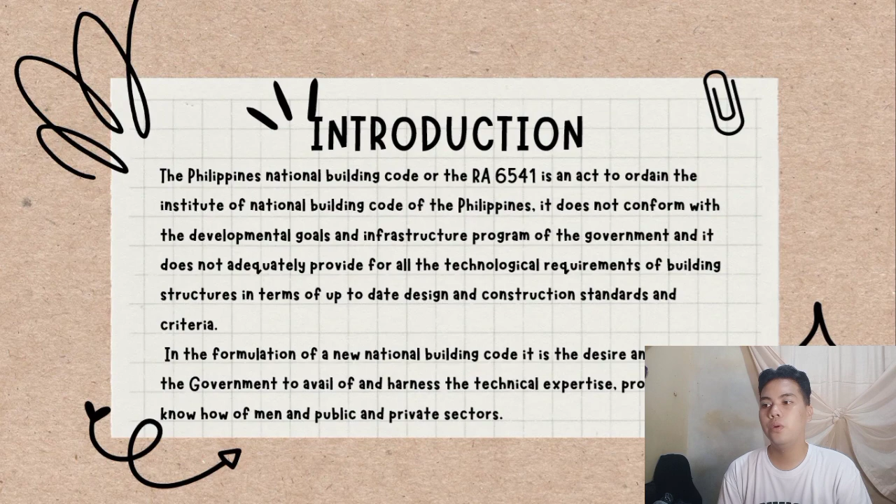In the formulation of a new national building code, it is the desire and policy of the government to avail of and harness the technical expertise and professional know-how of men in the public and private sectors.

General provisions on the building requirements and site requirements are as follows: 1. All buildings or structures, as well as accessory facilities thereto, shall conform in all respects to the principles of safe construction and must be suited to the purpose for which they are designed. 2. Buildings or structures intended to be used for the manufacture and/or production of any kind of article or product shall observe adequate environmental safeguards.

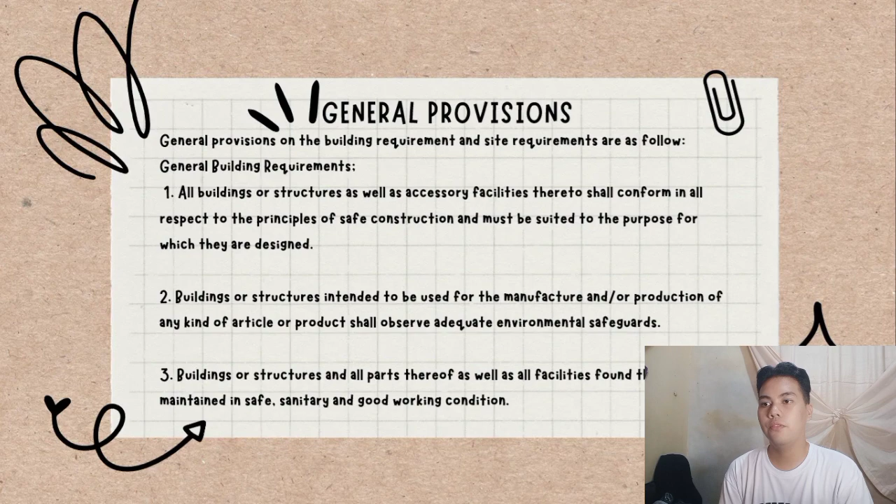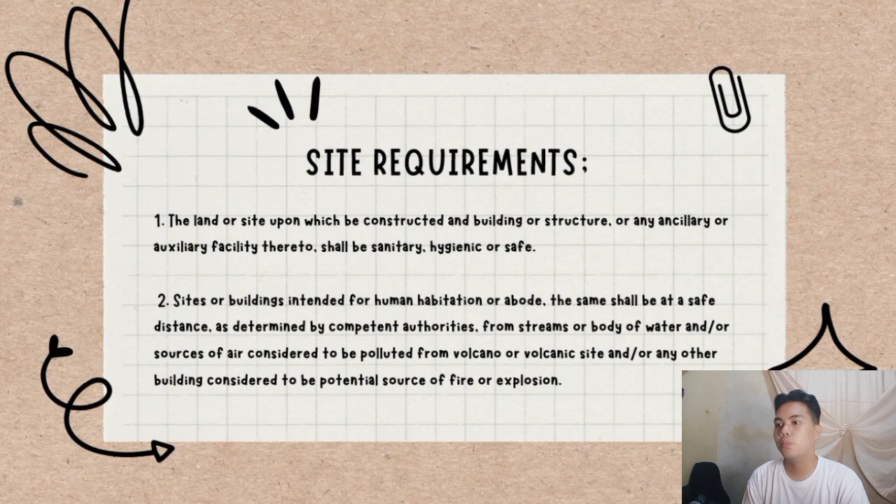So we have here the site requirements. 1. The land or site upon which shall be constructed a building or structure, or any ancillary or auxiliary facility thereto, shall be sanitary, hygienic, and safe. 2. Sites or buildings intended for human habitation or abode shall be at a safe distance, as determined by competent authorities, from streams or bodies of water and/or sources of air considered to be polluted, from volcanic sites, and/or any other building considered to be a potential source of fire or explosion.

So, types of construction. There are 5 types of construction. This will help the learners understand what type of construction or building they see in public. It will also help them identify materials to be used in making such infrastructures.

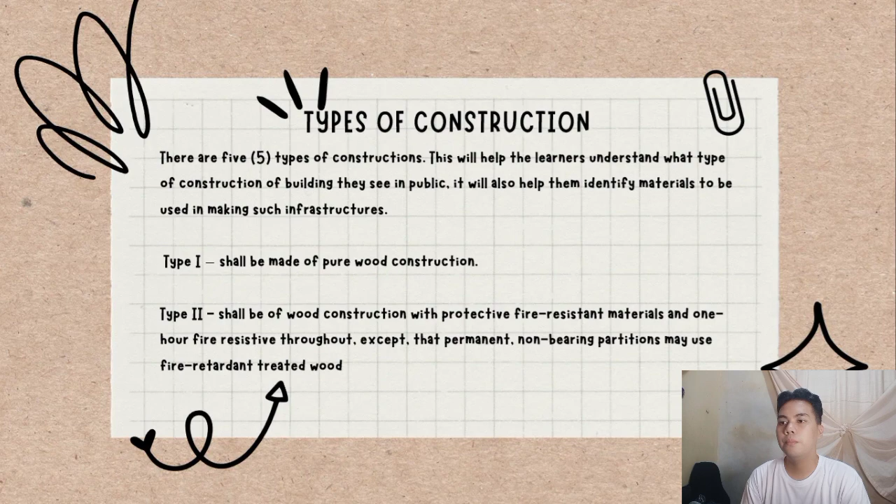Type 1 shall be made of pure wood construction. Type 2 shall be of wood construction protected by fire-resistant materials and fire resistive throughout, except that permanent non-bearing partitions may use fire retardant treated wood.

Type 3 shall be of masonry and wood construction. Structural elements may be any of the materials permitted. Exterior walls should be of incombustible, fire-resistant construction type.

Type 4 shall be of steel, iron, concrete, or masonry construction, and walls, ceilings, and permanent partitions shall be of incombustible fire-resistive construction. Type 5 shall be fire-resistant throughout, and the structural elements shall be of steel, iron, concrete, or masonry construction.

Fire-resistive requirements in construction: knowing the fire resistance of the different types of building construction will help managers determine what type of building is good for their businesses. This helps by lessening the risk of loss to the business and preventing it as well.

Materials used to construct a building have different fire resistive ratings. This is the degree to which a material can withstand fire, as determined by generally recognized and accepted testing methods. It is also important to understand the fire resistive time period rating. This is to prevent further loss to the business, since it measures the length of time a material can withstand being burned, which may be 1 hour, 2 hours, 4 hours, or etc.

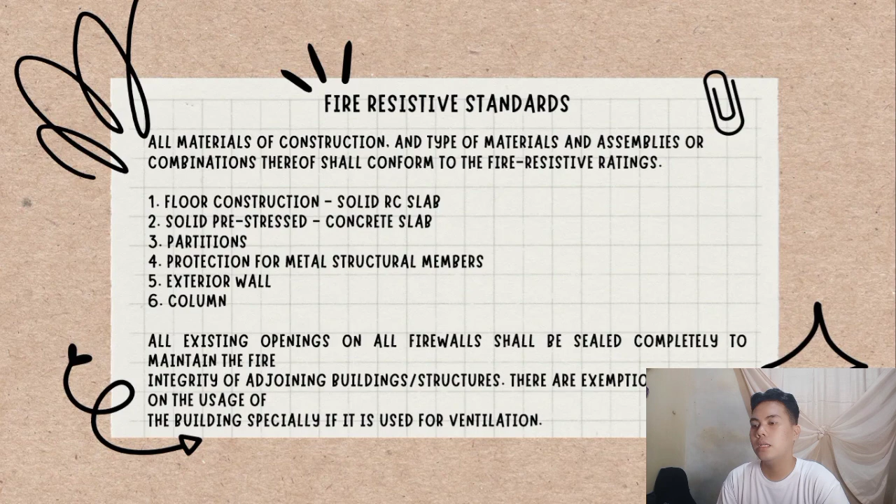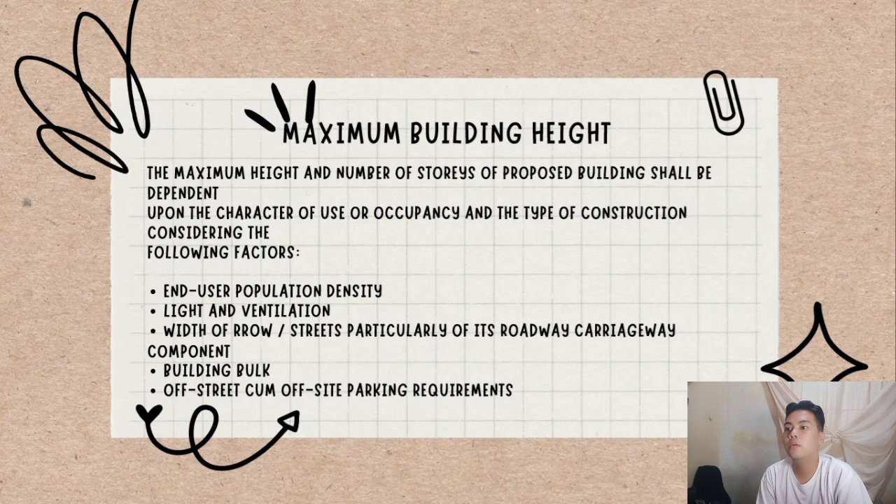Maximum building height. The maximum building height and number of stories of a proposed building shall be dependent upon the character of use or occupancy and the type of construction, considering the following factors: end users, population density, light and ventilation, width of road or street, particularly its roadway or carriageway component, building bulk, and off-street or off-site parking requirements.

The maximum height and number of stories of a proposed building in relation to local land use plan and zoning regulations. Environmental considerations like...

Environmental considerations like geological, hydrological, meteorological, and topographical factors.

Prevailing traffic conditions. Availability and capacity of public utility service or service system. Determination of building height: Building Height Limit or BHL is generally measured from the established grade line to the topmost portion of the proposed building or structure.

The BHL of any proposed building or structure shall only be as allowed under the NBC rule. For sloping grade perpendicular to the road with a difference in elevation of less than 3.00 meters, the highest adjoining natural grade or ground surface or finished grade sidewalk surface shall be the established grade elevation.

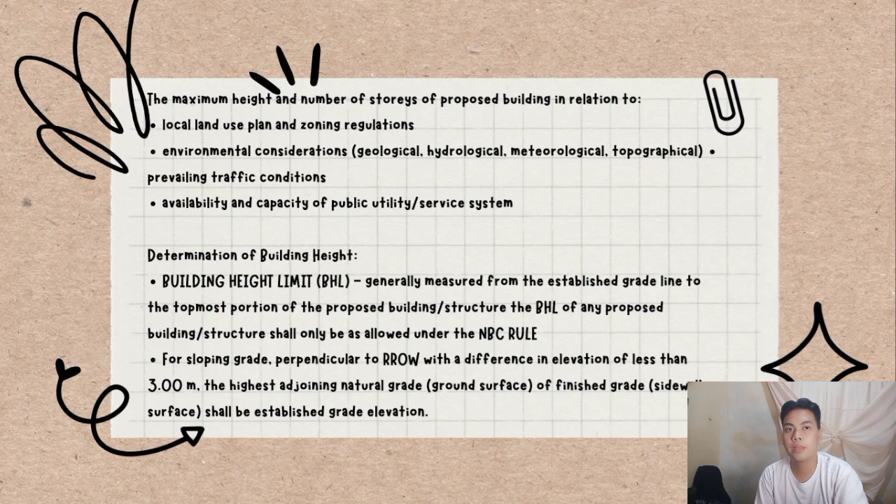For sloping grade perpendicular to the road with a difference in elevation of more than 3.00 meters, the average grade level shall be the established grade elevation.

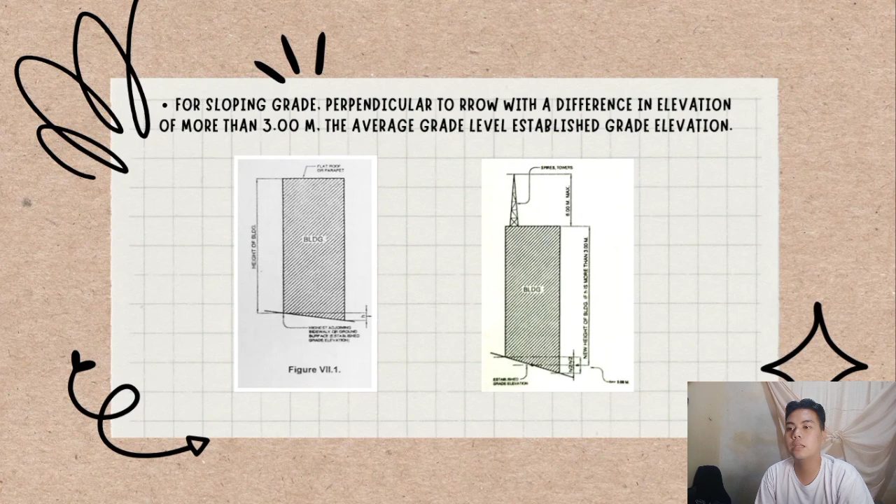Towers, spires, and steeples not used for habitation or storage are limited as to height only by structural design, provided they are completely of incombustible material.

The height of a proposed building or structure shall also be governed by the following road-based limitations.

A. If only one road services a lot, and such is only 6 to 7 meters wide, a BHL of 3 stories or 9.00 meters maximum shall be observed regardless of use or occupancy.

Lot size, dimension, etc. B. If only one road services a lot, and such is only 4 to 5 meters wide, a BHL equivalent to 2.5 stories or 7.5 meters maximum shall be observed.

C. If only one road services a lot, and such is only 3 meters wide or less, a BHL equivalent to 2 stories or 6 meters maximum shall be observed.

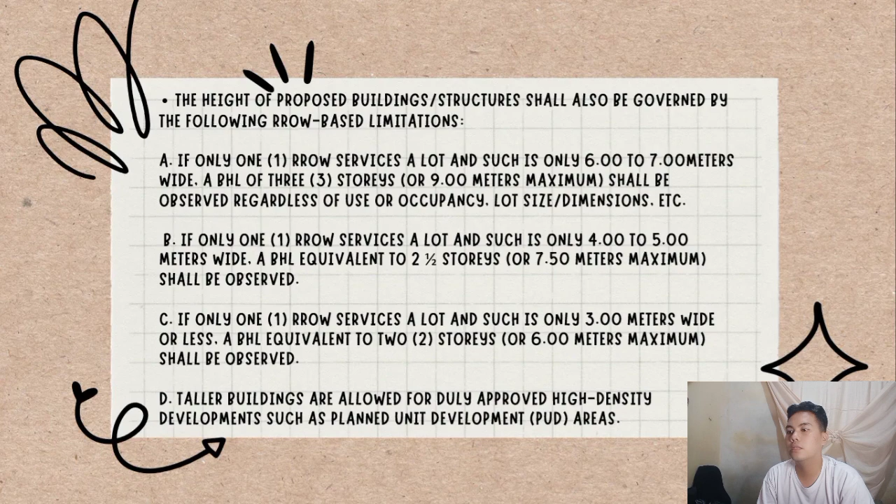D. Taller buildings are allowed for duly approved high-density developments such as Planned Unit Development (PUD) areas.

The following factors shall always be considered in the determination of building height. A. Soil characteristics, lot location in relation to fault lines and earthquake belts, proximity to volcanoes and other geological conditions. B. Hydrological conditions such as water table at the site and distance to waterways and shorelines.

C. Meteorological conditions such as frequency and intensity of destructive typhoons, monsoon winds, rains, prevailing wind speed and direction, and relative humidity. D. Effect of environmental condition on the building or structure and vice versa.

Coupled with the effective control of air, noise, and thermal pollution, radiant heat, light and shadows, etc., and the optimization of natural light.

E. Effect of traffic conditions on the building or structure and vice versa, and the satisfaction of parking or loading requirements in accordance with the rules of this rule.

F. Availability and capacity of public utility service system, considering availability and adequacy of electric power, potable and non-potable water supply, drainage, and sewage transportation.